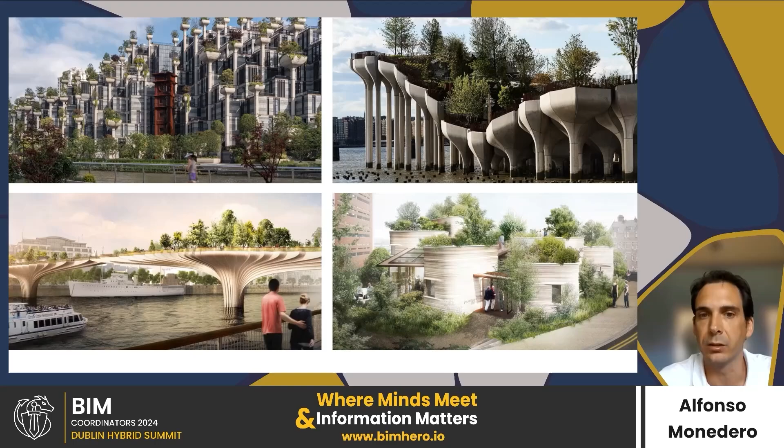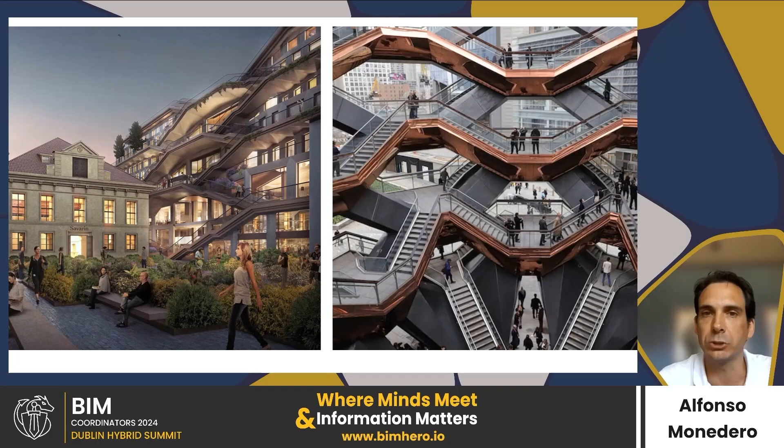We can have just two pots and make a bridge, or make a living building from the structural pots. We did the same with pleated glass, like glass houses, canopies or facades. We repeated it with pillow windows, whether in South Africa or New York, or with structural stairs making the facade. I'm going to show you two projects with the same idea, driven from two different angles: the physical and the digital perspective.

We started this project asking ourselves, how do we give individuality to this kind of inexpensive building? This was a humble building, and we had to give it something special. So we started asking ourselves how we can make the most of materials. Just getting metal foil and wrapping it became way more interesting than the original material. Then the next question was how we can control it, how we can know the results and anticipate what was going to happen.

So going to the workshop and 3D printing these rolling pins, we could do a lot of iteration with different materials and start seeing the results and behavior of the material. The next natural step is to scale up, and from this little model we could scale up to 1-to-1. To do this we had to create our own machines and start doing 1-to-1 mockups.

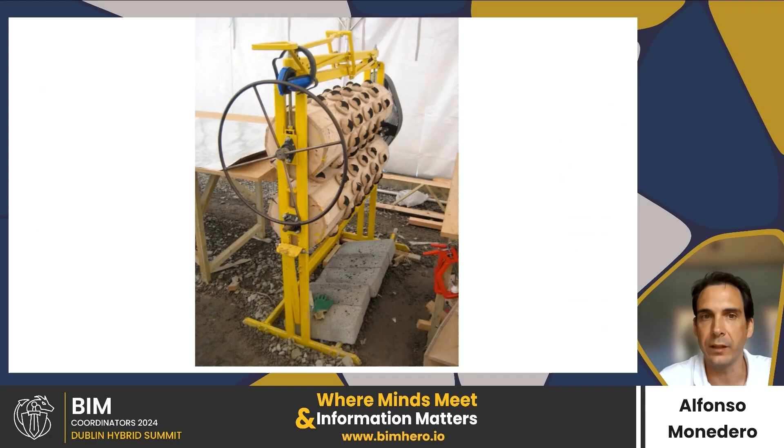Once we were doing the 1-to-1 mockups, the next natural step is to start doing construction details on the material and then go on site and build it. In this case, it was built in 2005, and we were the ones creating the facade because no contractor felt confident doing something like this for the first time.

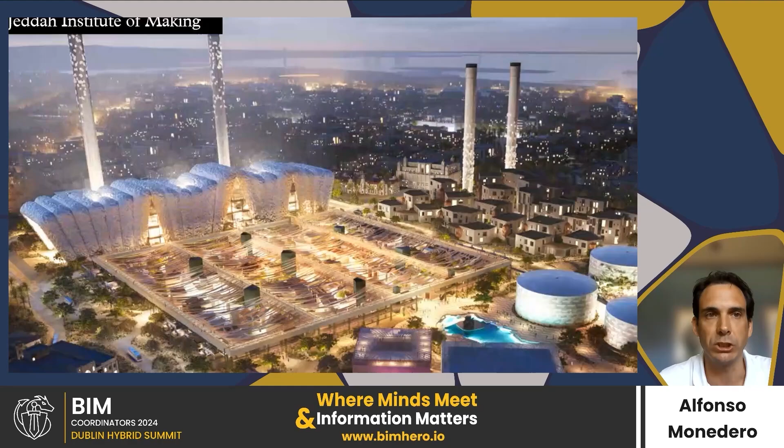20 years later, we are engaged in this other project, which is a completely different scale, different program, different budget, and with 20 years of technology evolution. We could not replicate the same process, and it was not feasible at this scale. But with the use of technology, we could start seeing how the materials behave when you apply identical constraints.

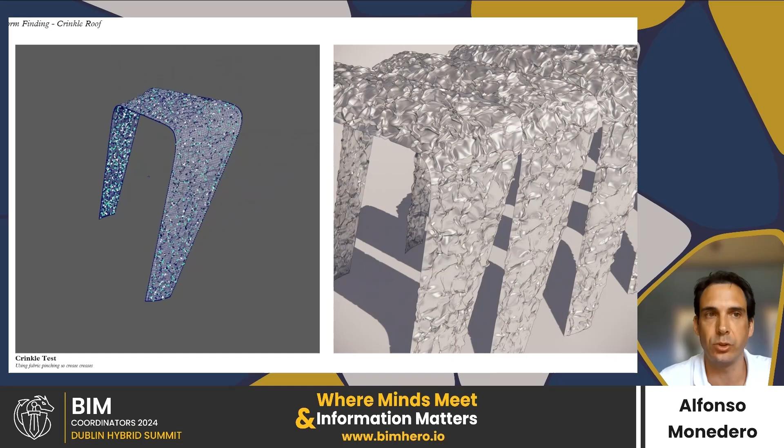We could replicate how the rolling pin was doing with a physical material in a digital world, and we could apply that to a facade. By doing this, we could anticipate more realistic results than just doing it with traditional computational design. The next step in this project is to start doing rationalization, to have repetition without noticing.

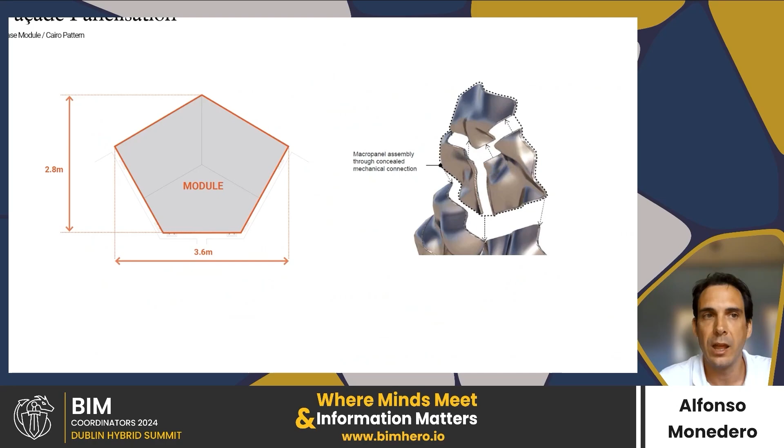To do this, we have the panelization. We went down to a module comprised of three different parts, making a bigger module of 2.8 by 3.6 meters. By using the Cairo pattern, we could have repetition in the panels without it being obvious on the facade. So the results are completely different from the other project, but with the same idea of how we can make a simple material way more engaging than its base material.

If we go back to the studio, looking at the evolution we've had in the last 10 years: as I was saying, in 2014 we were around 150 problem solvers. At the heart of it was Thomas Heatherwick, our design director and founder of the studio. Surrounded by him were the group of project leaders, the people he fully trusted. Then we had a flat structure of the other 100 or 100-plus designers.

Each of these individuals had digital skills. Most of them were very fluent in Rhino because we work in 3D, but we had some people fluent in Grasshopper, some in AutoCAD, visualizers with V-Ray, with Maxwell, some Revit users. But when we were assembling the teams, we were focusing on architectural skills, not the technology or digital skills.

So most times when we had a project, we had a group of individuals with different expertise in different software. So we could have the same project being run in Rhino, AutoCAD, and Revit at the same time, and rendering in V-Ray and Maxwell at the same time.

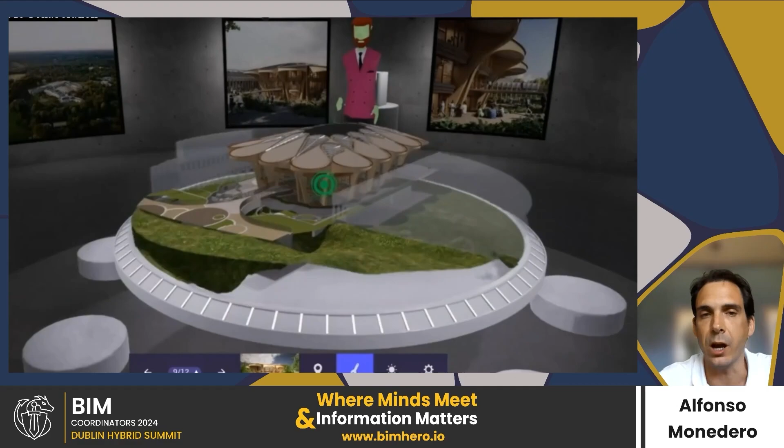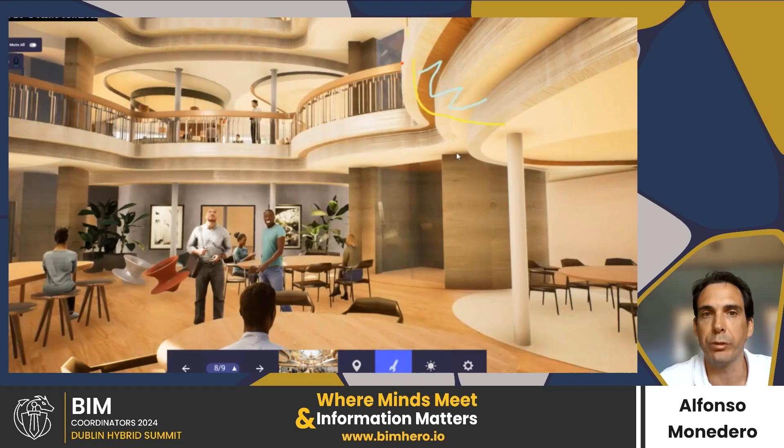If I show you a bit about immersive media, the first thing we do is VR, the obvious one. We don't just do VR visualizations, but also collaboration. We can get the real models into this platform and start commenting and doing design reviews in 3D space. Many people can access the same model, commenting, drawing, making details, changing materials, taking measurements. This way we have true 3D collaboration and design review.

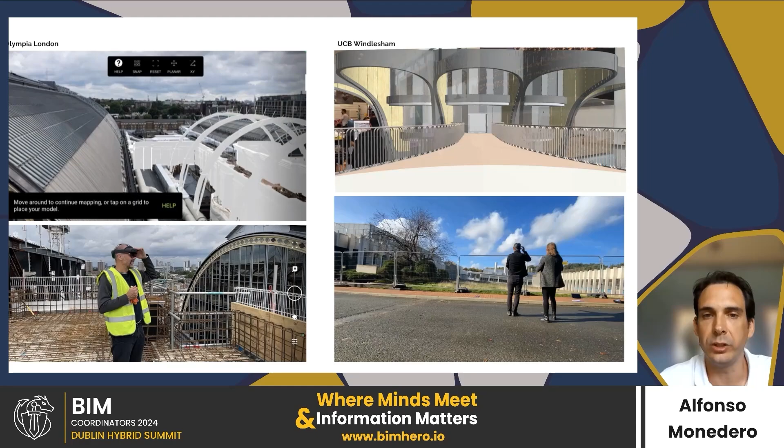The next one is mixed reality, which we use in 2 different contexts. The first is on site, to review the progress of the project and what the next steps would be, kind of a 4D phasing, or doing iterations on the empty site to see which options would fit better with the context.

The second context is using AR for design. In this case, we were designing a car, and we didn't have expertise in cars from previous projects. So it was really valuable to put the car into a mixed reality space and compare sizes with real objects. We saw the wheels were too big for the real world, and had to redesign that area of the car.

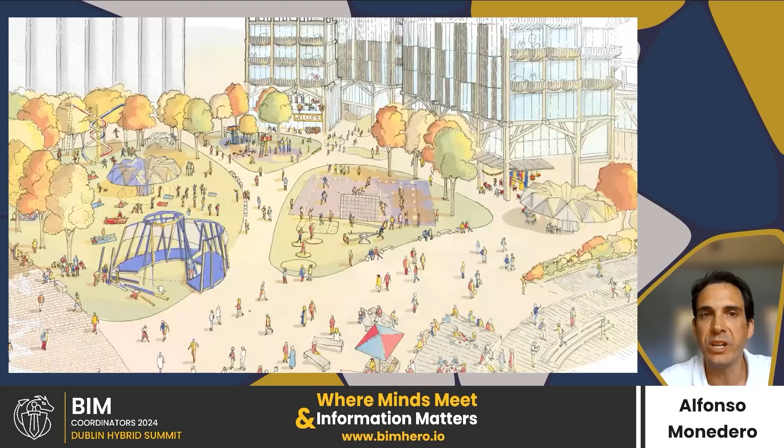At Heatherwick, we love storytelling. That's how we communicate ideas, so our sketches are the best way to do so. We've been exploring different types of sketch modes to present our design in the best way possible, like digital sketches, adding a sketch line on top of render views. This way of expressing ourselves is key in communicating the design intent.

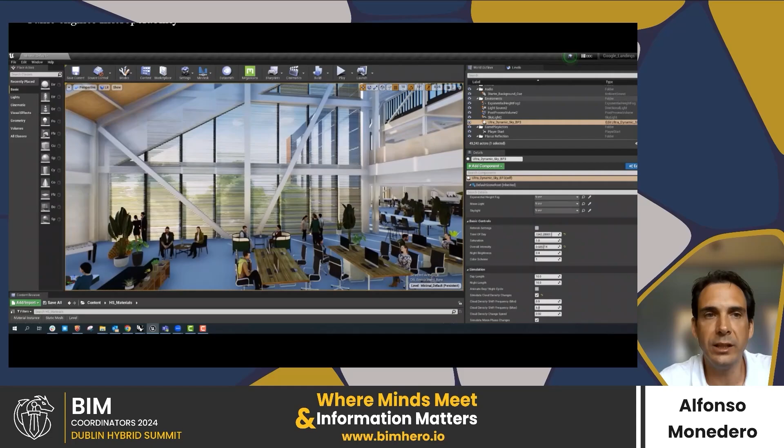In this case, we can do interoperability, controlling from Grasshopper what is happening in real time. With just a slider, we can have a true live and real model. We don't need to export or import; we can control the geometry from Grasshopper and have different options in real life.

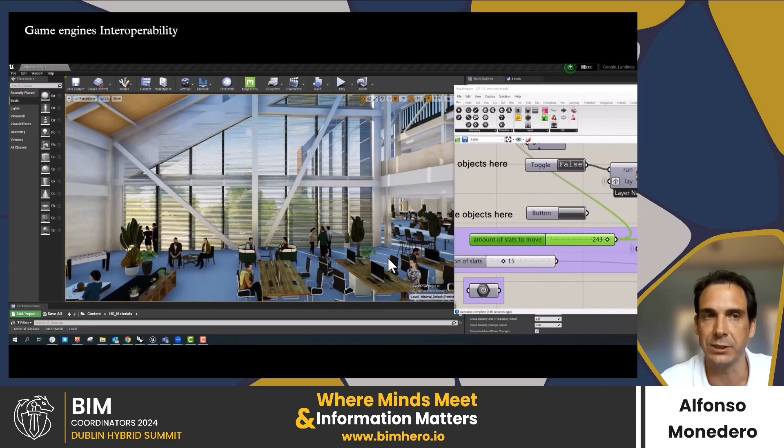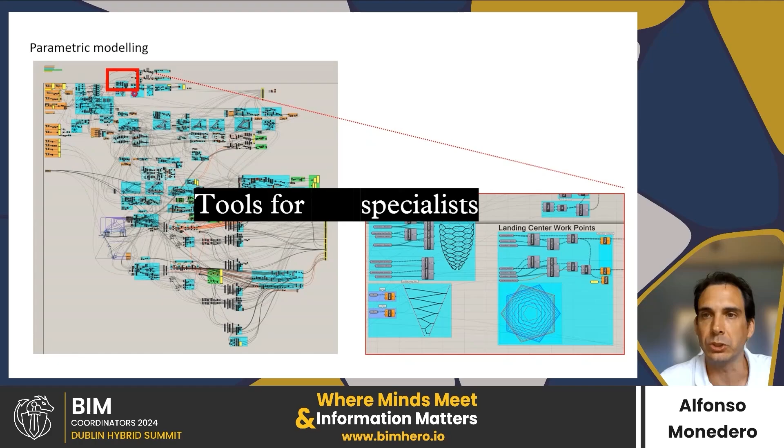We had the bottleneck that only the person creating the script was able to navigate and modify it. It's really efficient, but if that person goes on leave or sick leave, then we had a problem. We had to change the strategy from tools for specialists into tools for non-specialists.

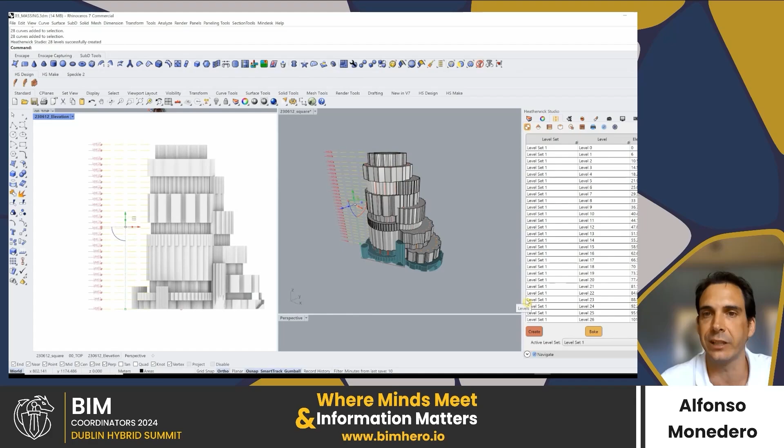We have worked to make our Heatherwick toolbar for Rhino, which works like bringing BIM capabilities into the Rhino environment. We can assign levels, so the geometry is not floating in space, it's assigned to levels. When we modify the levels, the geometry moves with it.

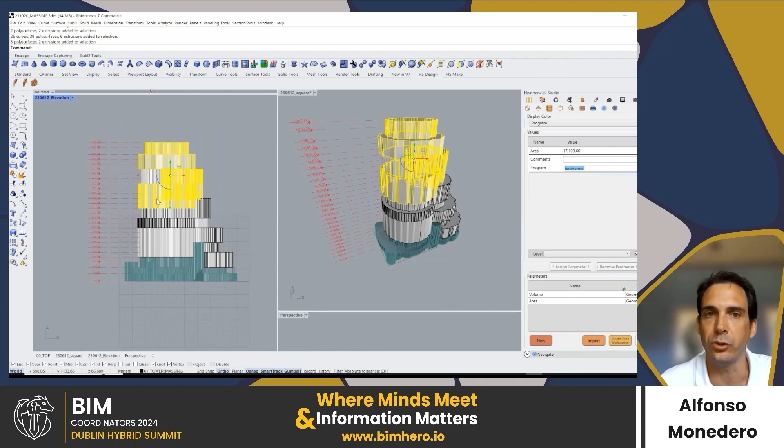We can bring parameters to geometry. We can navigate with these levels. We can produce schedules and export these schedules to Excel. It's the basic information that we can have in BIM software, and we're bringing that into Rhino. This is helping us with the transition from Rhino into Revit, because if we have the data already in Rhino, it's fairly easy to transfer that into Revit.

We have been exploring the world of AI and generative images, like every other firm in the industry. We started using Midjourney, but found out the results were not adhering to our style. They were too generic. If we keep using Midjourney for producing images, we would lose our touch, the thing that makes us different from our competitors.

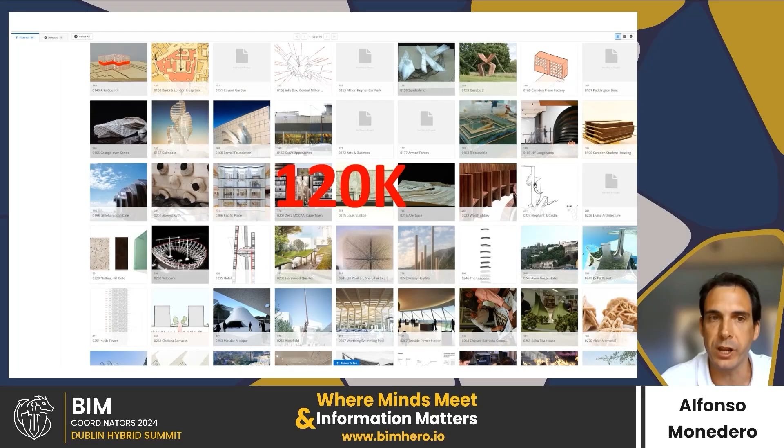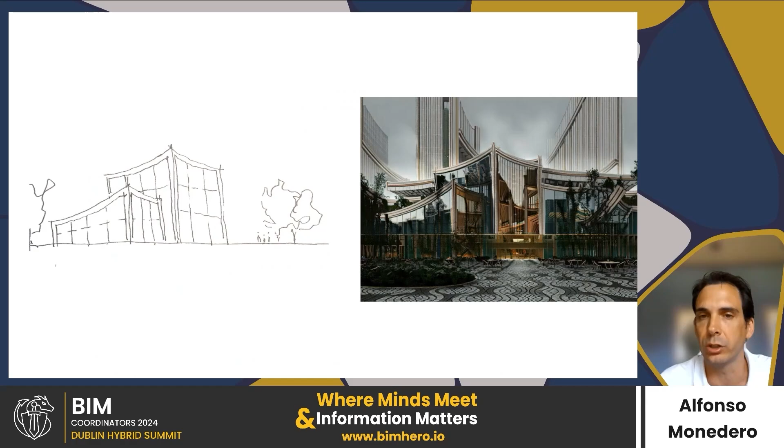We realized we have a library of 120,000 images in our archive. So if we start teaching diffusion models with these images, when we bring a hand sketch and ask it to make a render, we'd be way closer to our style. It's not perfect, not polished enough to have a conversation with the client, but it's good enough for us to start having internal conversations about where we want the project to go.

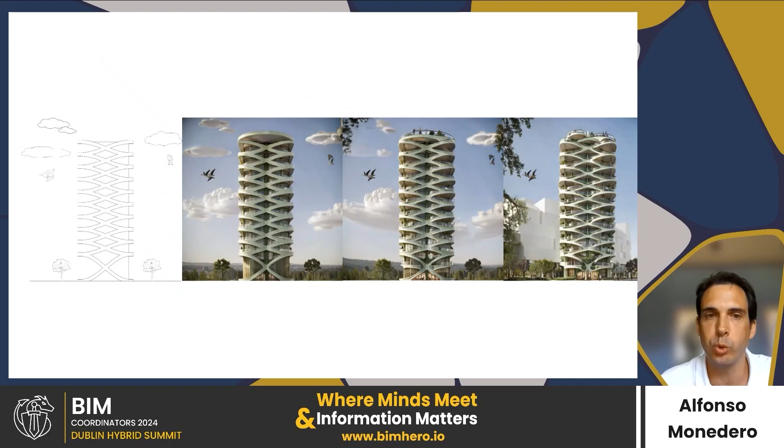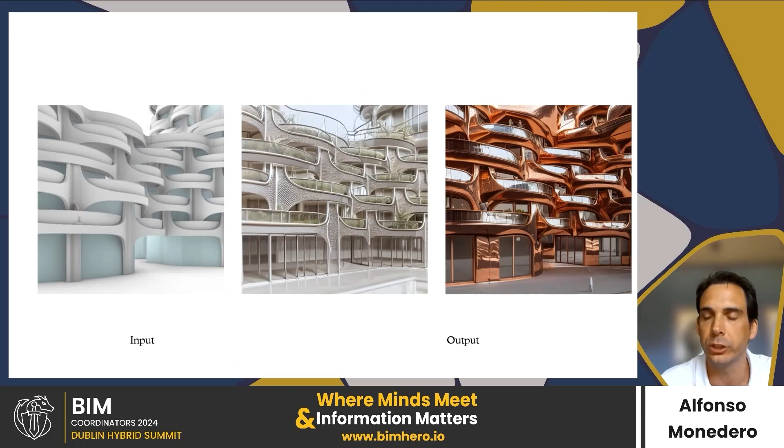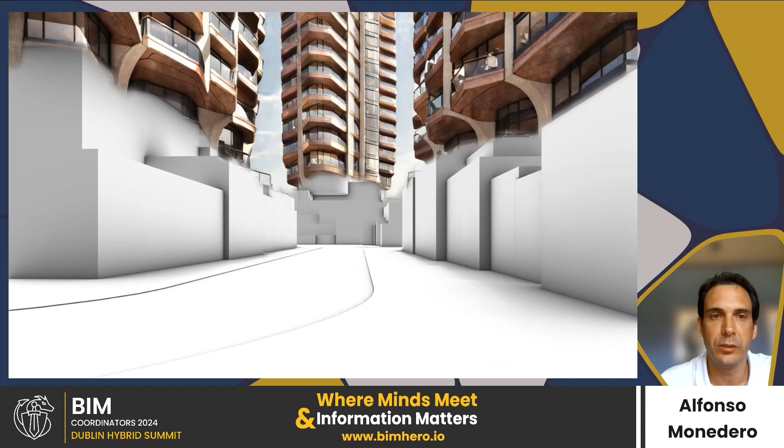We can bring CAD lines, like drawings made in 2D, and get different options fairly quickly from the model. We could also bring a screenshot and ask for different materials, so we can check how that material would behave with the geometry. Or we could bring a Rhino screenshot and start painting on top, like the top part, we want to use this project, the bottom part, we want to use this other project, and then get different options fairly quickly.

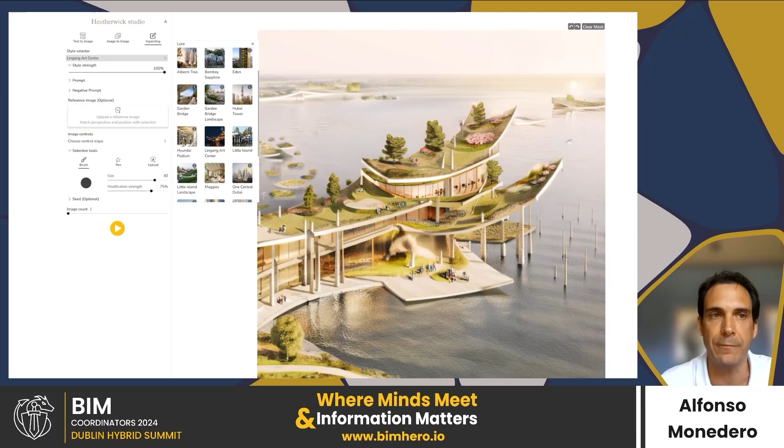So we have synthesized these ideas into our Heatherwick AI tool. We have text to image, image to image, and in-painting.

In the BIM world, we made a digital strategy in 2018 where we focused first on interoperability. Each year we have one project, like the magic button, which was our internal process. Rhino.Inside, we got exposed to in 2019 and started using it in real projects, and BIM in 2020. After that, we felt the interoperability issue was solved, so we moved into QA/QC of models in 2021, 2022 and 2023. We were focusing on automation, and this year we're focusing on intelligence.

So if we skip the interoperability part, the BIM pulse does QA/QC every time we synchronize the models, creating a report that we can keep track of. So we have a real-life track of what is happening in the models.

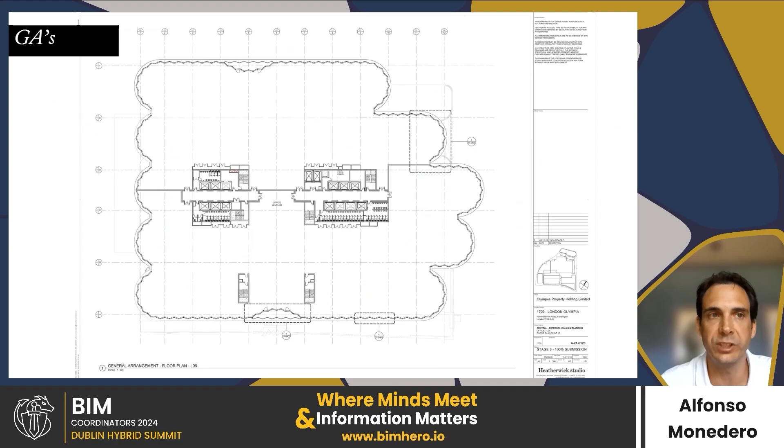With the Autodocs app, we are creating drawings automatically and views placed on drawings. We can produce a full set of GAs, but also assembly drawings that combine different views into the same sheet. This is improving our efficiency in doing the cartoon set.

As I said with the post-it notes, we also do the pin-up walls, and we had to move it into the digital world after working from home during the pandemic. We used the pin-up walls for design reviews and drawing on top of existing drawings, and we also started putting in our exports from Revit.

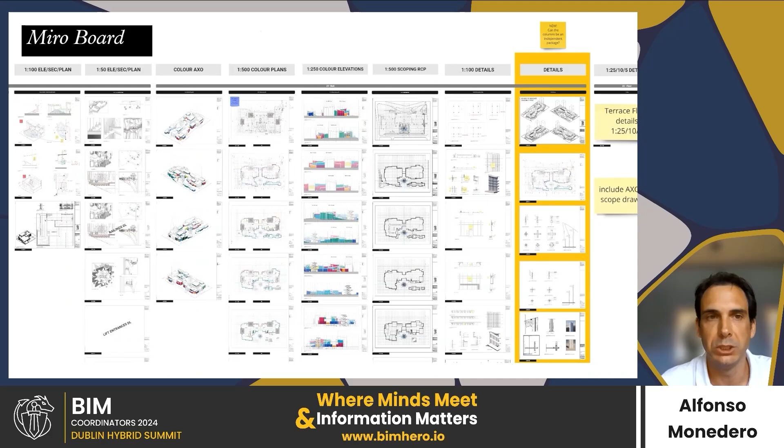So we had to create an app that automatically gets the drawings from Revit and pastes them into a Miro board. The result is that with just a click of a button, we have all the packages organized as columns and sorted by drawing numbers.

The last bit would be the Copilot app, where we have Revit integration of all our documents, and these documents feed a chatbot that we can access from Revit. So the first part is doing a basic chatbot with existing documents, and now we're working into leveraging the information within the model.

To summarize, our integrated digital approach is not a mere consequence of technological advancement, but a crafted strategy designed to augment our core strength, design innovation. And by maintaining distinct yet interconnected digital domains, we can delve deeper into each specialization, ensuring a holistic, enriched, and most importantly, design-centric outcome.

Because at the center of the digital world, we have the project, which is why we exist: to make great projects and make people feel emotions when they visit them. That's the core of what we do and why we exist.